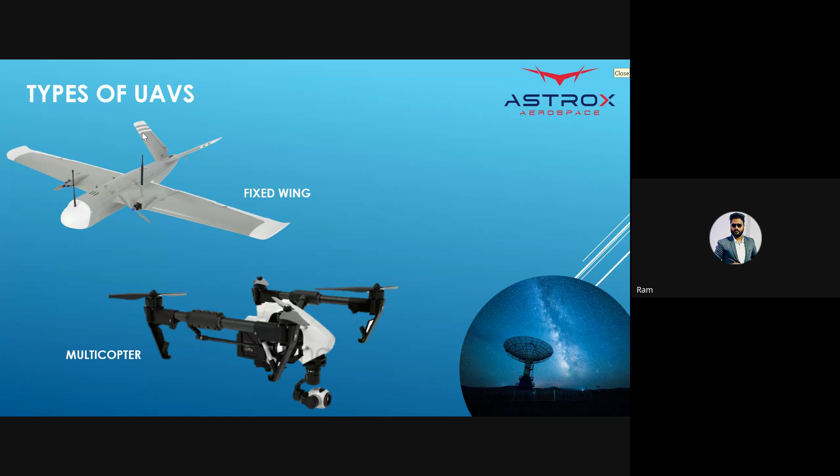Single copter is like a helicopter model. So these are the four major models used for all other applications: fixed wing, multi-copter, single copter, and hybrid VTOL.

The advantage of multi-rotor is that it's a vertical takeoff, very easy to operate, very low cost. It's a short time deployment - within 1 or 2 minutes you can deploy it for operational purposes.

But the fixed wing takes time for calibration work and checking the wind condition. We have to check the weather condition, the zones, landing points, what is the area coverage, and the entire wind direction. So there are a lot of things we have to notify during the flight.

But multi-copter is not like that. We only have to check the zones and do a pre-flight checklist. That is enough for operating the multi-rotor. Single rotor is in the same condition as a fixed wing.

In the previous session, I told you, right? DGCA classified some rules. The major rules everyone should know about - drones are classified based on the weight category: nano category, micro category, small category, medium category, and large category.

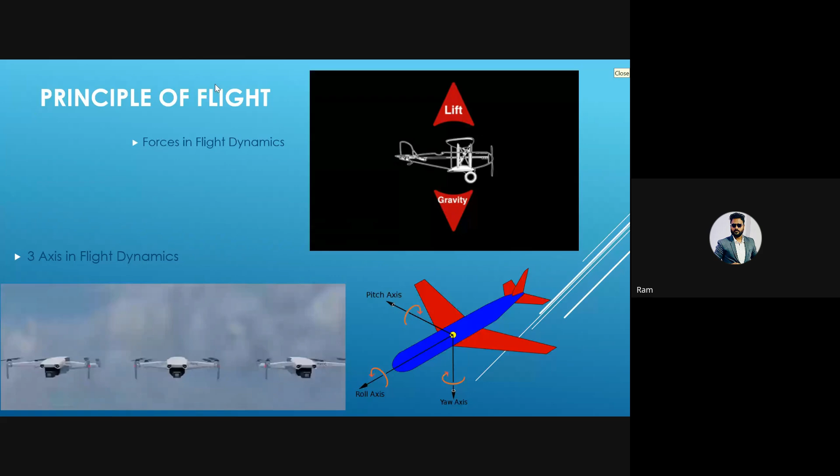The same four rotors are used to propel thrust downward, and then the takeoff will happen.

One main thing, the rotation of the drone's propellers, is very important. Check the rotation of A, B, C, D. If propeller A rotates clockwise, then the opposite one, D, also rotates clockwise. If B rotates counterclockwise, C should also rotate counterclockwise. Only then will all four motor torques be compensated.

That's why a helicopter has a tail motor, to compensate for torque. The same method is used in drones to compensate for torque.

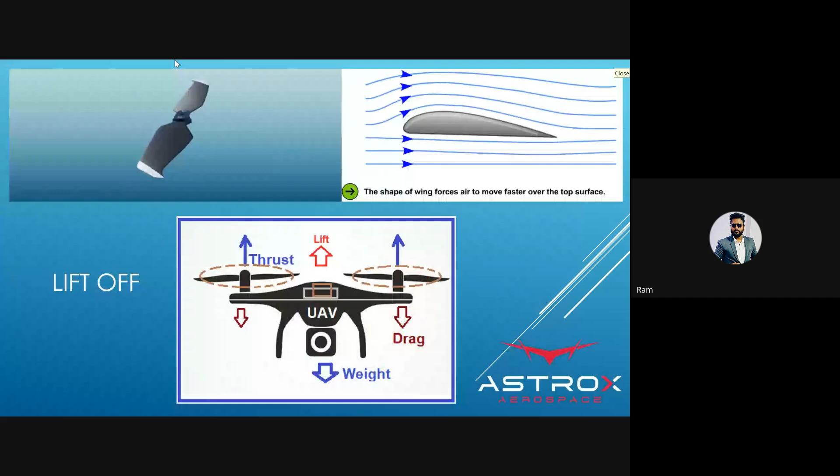Mostly we use drones in X configuration for application purposes, because it gives more stability.

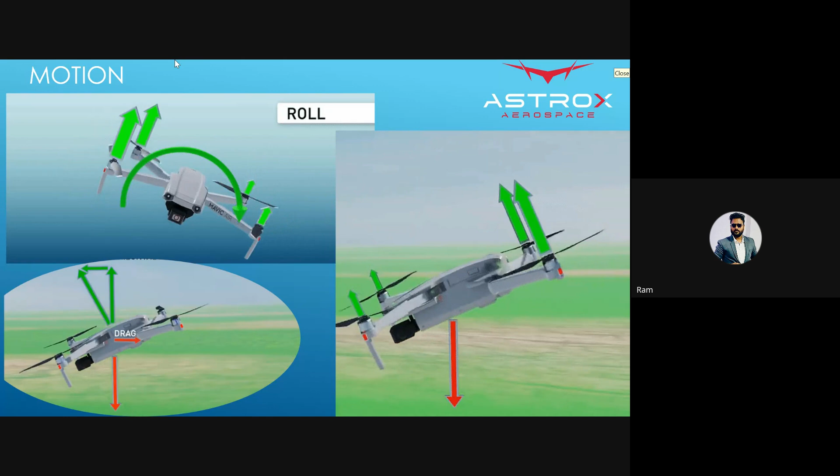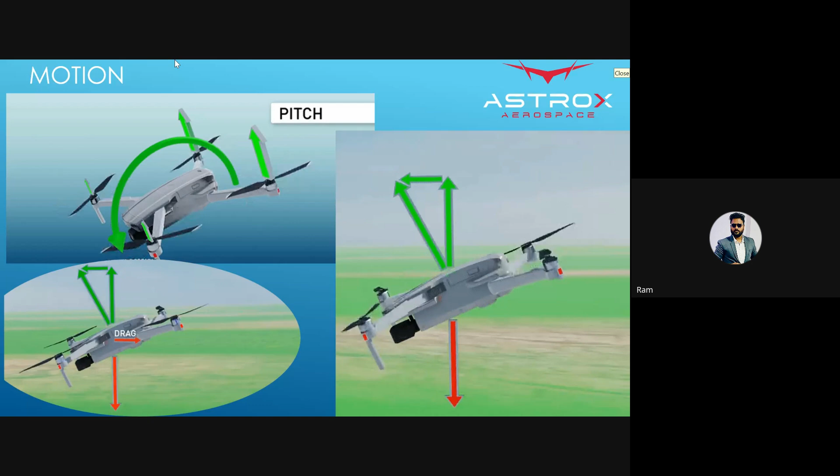This is the roll, and this is when it's moving in pitch. So these are the motions of the entire drone: pitch forward, pitch backward, roll right, roll left. There are only these four directions used for the drone.

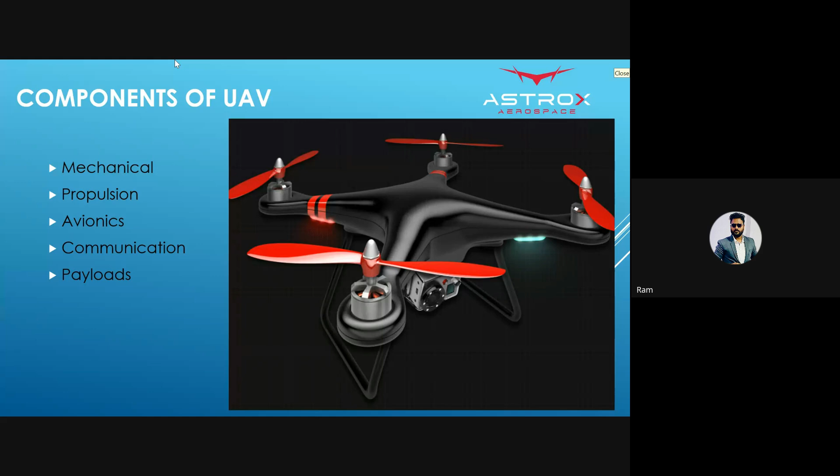The mechanical system is the entire drone structure. The propulsion system includes the motor and propellers. The avionics system is the entire electronics which communicate from ground to the air unit, including the IMU and other sensors — all of that comes under avionics and communication.

The payload is purely based on the application. So you can see which drone is used for which application, like survey or agriculture — that comes under the payload category.

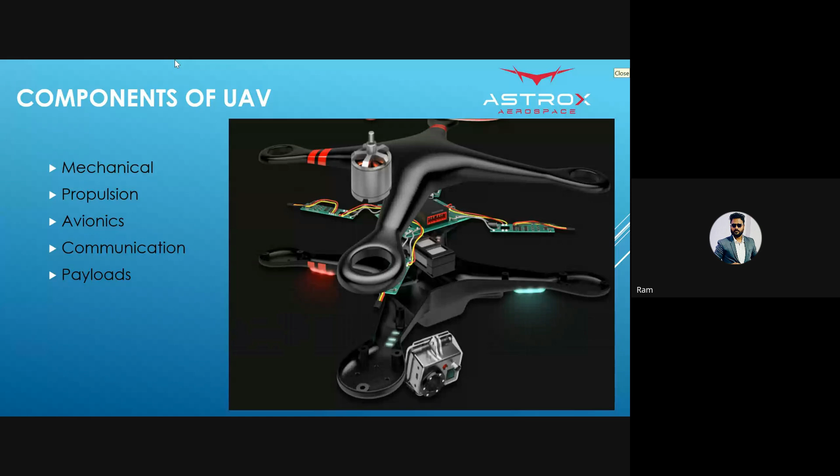These are the mechanical components, basically the frame: X frame, fixed wing meaning the wing, the fuselage, and the landing gears. These are the components of the aircraft.

This is the propulsion system. Especially for drones we use the BLDC motor, the brushless motor, because it's a high torque motor which gives more thrust compared to a normal motor. Its weight is also less, and weight plays a major role in the drone — the more we focus on reducing weight, the better the drone we can get.

Mostly all motors use an electronic speed controller, so each motor has an ESC rated at something like 30 amps, 40 amps, or 60 amps, depending on the drone's configuration. The propulsion system mainly has two important parts: the electronic speed controller and the motor, along with the propeller.

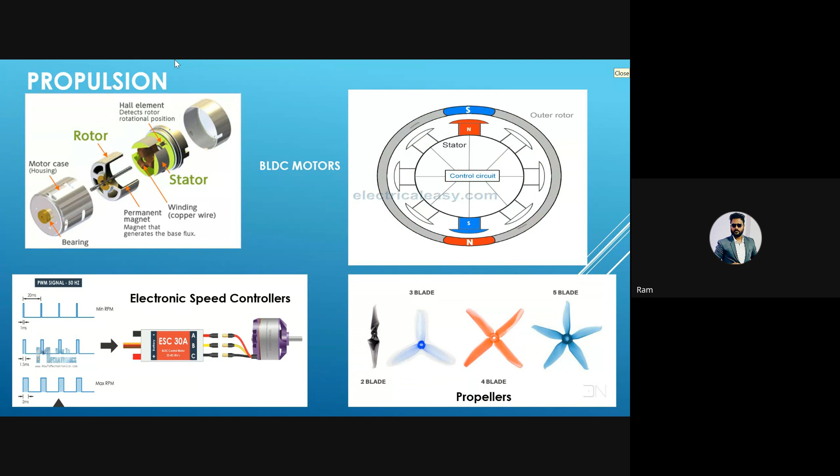There are multiple types of propellers: two blade, three blade, four blade, five blade — all based on the configuration. We have to choose the propeller size and ESC capacity, like 40 amps, 60 amps, 80 amps, 100 amps, or 120 amps, purely depending on the product you build, like a 5 kg drone or a 10 kg drone. This is the entire propulsion system used for the drone.

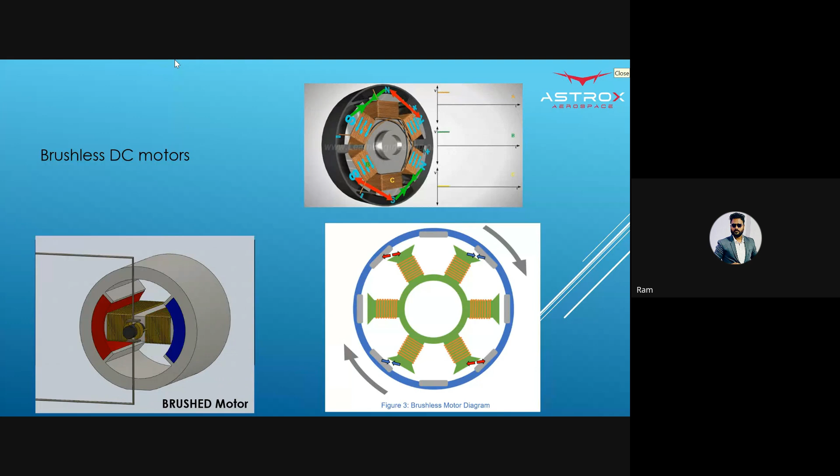See, in the brushed motor, the armature rotates, but in the brushless motor, the outer rotor rotates while the stator remains fixed. Only the outer case runs. This is the difference between the brushless motor and the brushed motor.

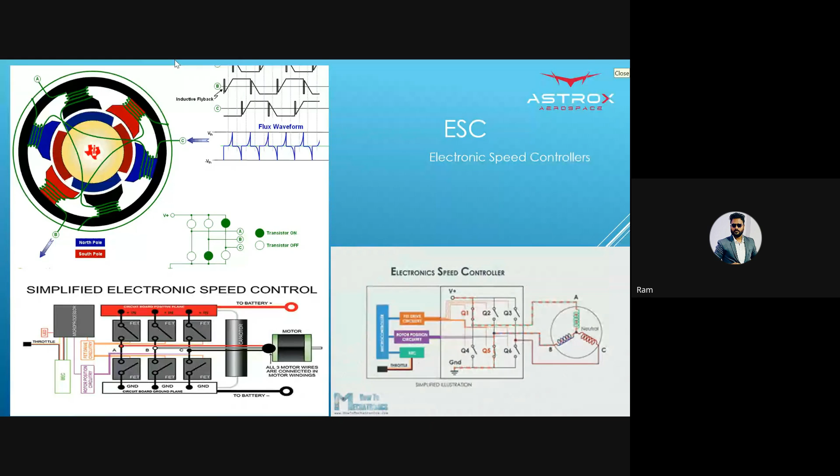Now coming to the avionics system. In the drone, the major thing is the flight controller. It's one of the main motherboards, like inertial systems, computers, whatever you call it. The major role of the drone is the flight controller.

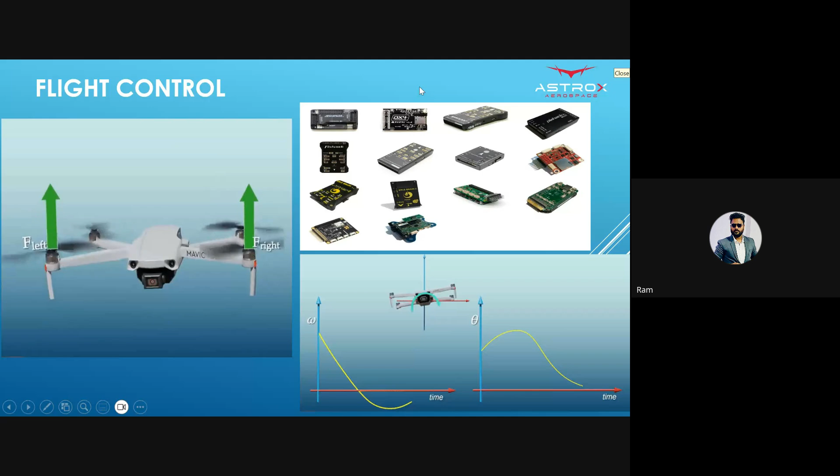In the market there are a lot of flight controllers: single IMU controller, dual IMU controller, triple IMU controller. It basically depends on our requirements. For industrial grade, at least we require a 3 IMU redundancy FC, because it's very stable compared to single redundancy IMU. This is the flight controller which is used for all drones.

Flight control's main thing is the inertial measurement unit. So IMU has the gyroscope, accelerometer, magnetometer, depth sensor, optical flow sensor. But the major essential requirement is the gyroscope, accelerometer, and magnetometer. These three are the major requirement to operate the drone in a very stable condition.

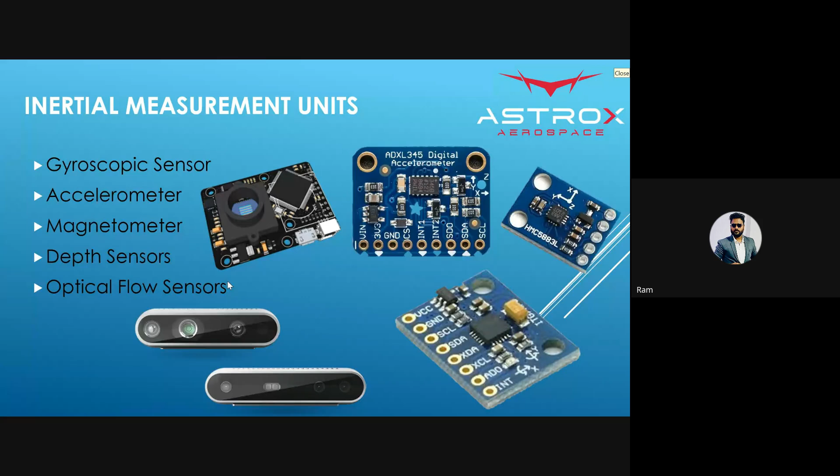You can see the accelerometer. Basically, the accelerometer is used to measure the acceleration of the flight controller. It detects the acceleration of the entire drone. Based on the drone coordinates like X, Y, Z, it will stabilize the entire drone system.

Gyroscope is the control of the entire axis, like roll axis. It measures the entire system and gives input to the flight control. Flight control gives input to the entire ESC, which gives input to the motor. So the entire ecosystem works purely based on the IMUs.

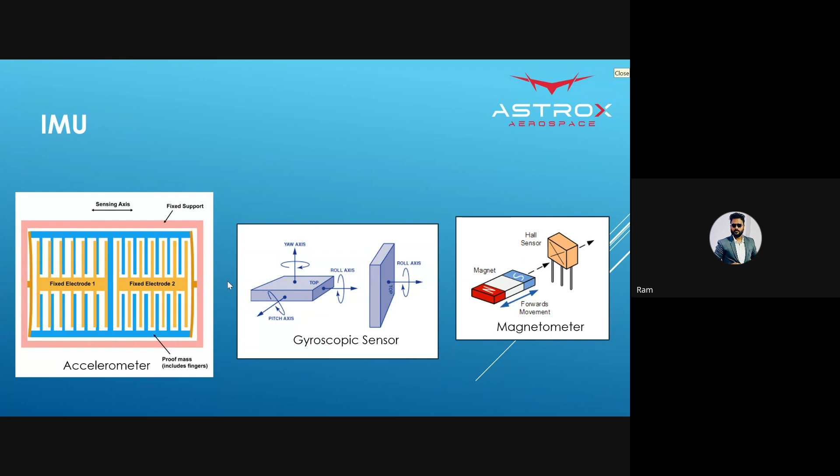The magnetometer measures the entire magnetic interference. For example, if the drone is flying near some high capacity EMC or EMI, like electricity wires, the magnetometer will be affected. So the entire drone will become unstable and it will lose control. That is why we use the magnetometer, to measure the entire magnetic field.

Now coming to the communication. In the drone we have multiple communication systems: radio signal, satellite signal, internet signal, which we already developed with indigenous technology. These are all the technologies used for communicating with the drone from the ground station to the air unit.

Drones flying around 10 meters, 20 meters, 100 meters, 120 meters - if you give some input, like a 20-degree rotate or 20-degree elevation, or 10 meters forward, the immediate response should happen within a time of milliseconds. So basically we use two technologies: radio controller, radio frequency, and we can also get telemetry data, like what is the battery capacity and other things - everything we can get from the drone.

These are one of the major communication tools, radio signal. Everyone majorly uses radio signal. So this is a very effective transmission method currently in use.

Another one is satellite. Satellite is very tough, and also it has very high latency issues - around 3 to 4 second delay in signal. So this is not sufficient for drone operation.

Internet is very good for both radio and internet combined, because currently in India everywhere 4G network, 3G network, 5G network are available. So internet is also sufficient, but the most accurate is only the radio signal. So radio signal is the best thing for controlling the drone and ground station.

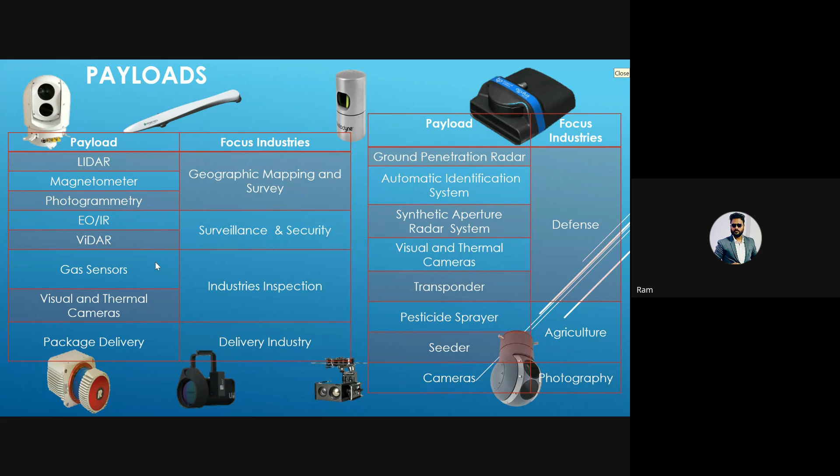Next is the package delivery payload. Package delivery is nothing but essential goods, medicals or other items, used as payload for delivery. Whatever package we can integrate with the drone, we can send from A to B location for delivery purposes, like cargoes, medicines, and other goods transferred from one location to another.

So I'll show you one by one in detail. The first payload is the multispectral camera, one of five sensors: red, green, blue, and others. There are five sensors. The multispectral camera is used for agriculture, cropping, and health monitoring purposes. We can easily get irrigation data of the crops and crop health of particular areas. Based on the data analysis, we use agriculture drones for pesticide purposes. It's a very effective method to verify crop health conditions.

Another one is the photogrammetry camera, used for mining, mapping, and 3D map generation. It has lidar sensors used for 3D mapping, so we can easily get data from mining areas, forests, and railway tracking. The 3D mapping camera, or photogrammetry camera, is used for mapping purposes.

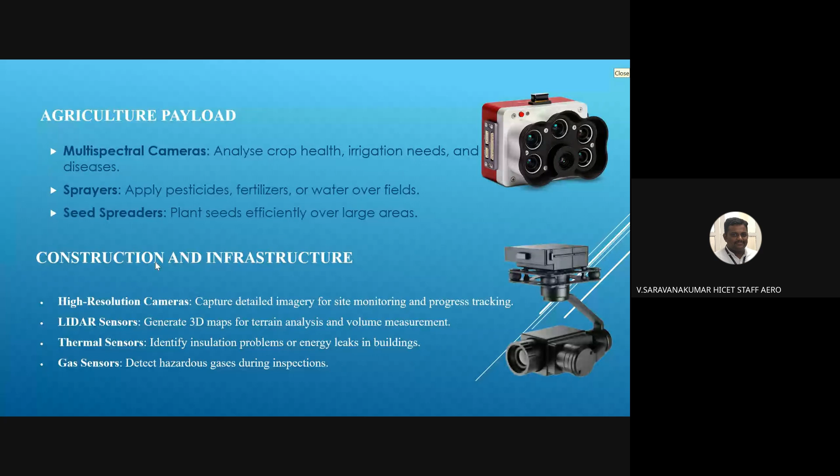Sir, is there any doubt in the payload? Is this the only payload used for all applications? Yes sir, tell me. Sir, shall we ask questions regarding the payload now, or can we go at the end, sir? Whatever it is, sir, what about ultraspectral? I'll tell you in a while. Can I go on? Yes sir, you can go on. Okay, at the end we'll ask. No, these are questions, the payload sessions will continue.

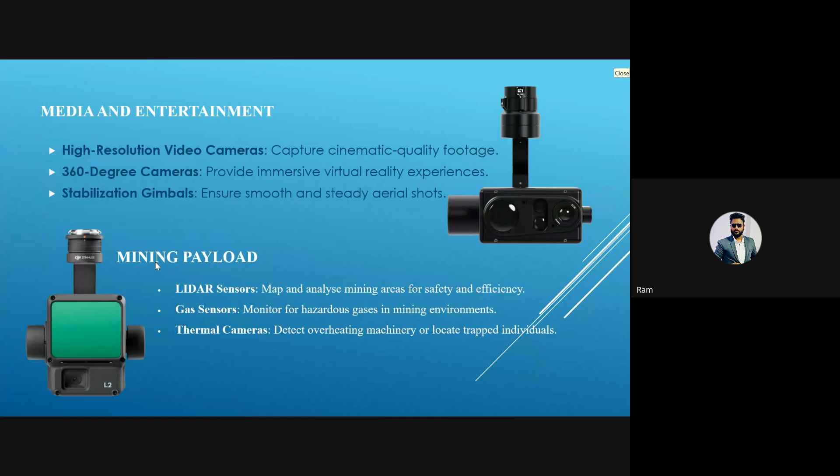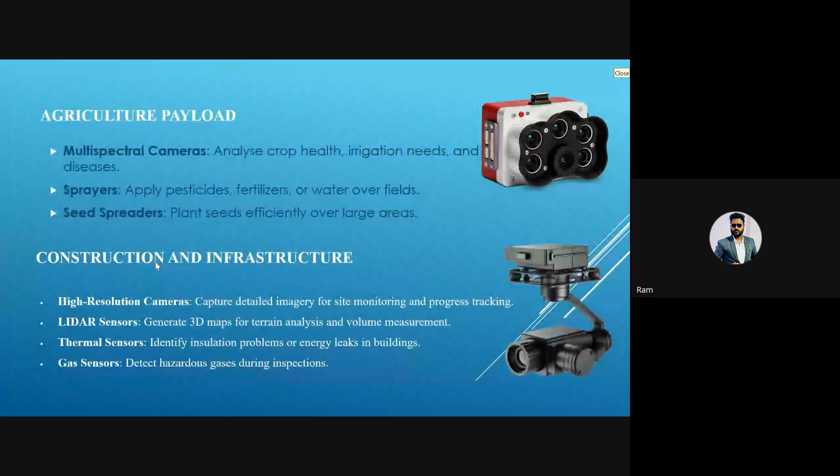These are the payloads you use for drones in all applications like surveillance, survey, deliveries, inspection, and monitoring. I have mentioned the entire payload here. Apart from this, is there any doubt in this payload like lidar, photogrammetry, gas sensor, visual and thermal sensor, or deliveries? You can tell me any doubts, sir. These are the payloads used for drones.

Then we'll go for some advancement. So, payloads, no doubt, right sir? I think you know, sir. Okay participants, if you have any questions, you can ask related to payload. You can ask it to me. Otherwise, in the final session we'll close with advancement of drones. Then we'll do some Q&A. Okay, so these are the drones used for all industries like surveillance, agriculture.

Sir, regarding the payload, you are using it for agricultural applications. Suppose while spraying the pesticides, once the tank level varies, how is it dynamically balanced?

See, mostly in agriculture we use 6 motor drones, like a hexacopter. Also, as I told previously, there's the IMU. The IMU maintains the stability of the drones.

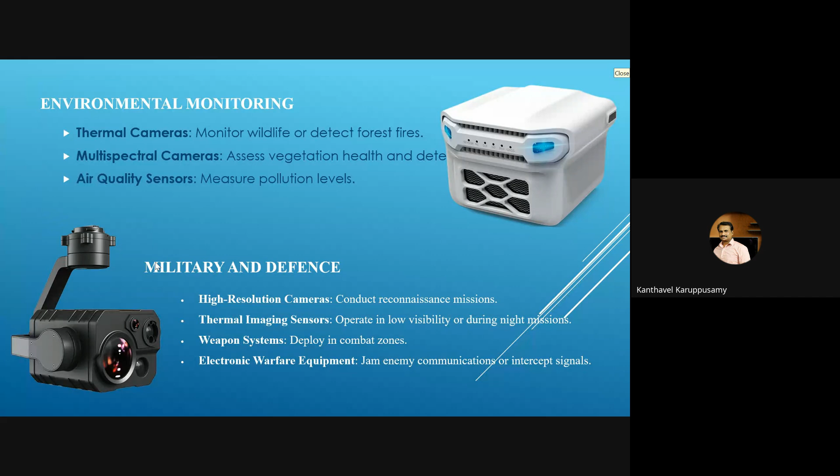So the IMU is helpful. What is the maximum range available, sir? Which one, sir, thermal sensor? The thermal sensor detects a range of around 1.2 to 1.5 kilometers, sir. The visual sensor can cover around 2 kilometers. It's capable for detecting elephants purely under tracking FOV. Currently we use it to detect at 120 meter height, but it can detect elephants around 1 to 2 kilometers easily. Thank you, sir.

Sir, what will happen if the drone goes beyond the range? I'll tell you one thing: every manufacturer provides a defined range in kilometers before the drone is used. For example, agriculture drones are restricted to around 1 kilometer, while surveillance drones have a range of around 10 kilometers. You cannot operate the drone beyond that limit. Even if you give it thrust, the drone cannot go beyond 1 kilometer. So every drone has a restricted range defined by the manufacturer. If you try to go beyond the set limit, it cannot go and it cannot receive your command.

So will it give some alarm or indication to us? Yes, it will give an alarm. There are two options: one is that you can give an input in the settings to enable RTL. RTL is one such technique, return to launch or return to home. If the drone breaches the entire range, for example if the maximum range is 1 kilometer, once it reaches that 1 kilometer, it gives the information and activates RTL.

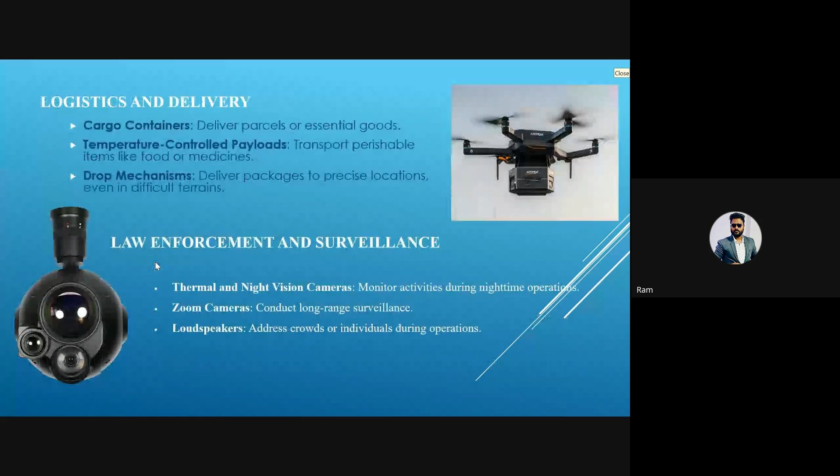Sir, regarding this electronic speed control, I heard that the control will be done in two parts - one is like a flight controller and the flight computer. Like what exactly it is? Okay sir, the basic working principle I'll tell you.

The flight controller is the major brain of the drone. On the ground, you can give an input like go 1 meter. So the ground controller gives a signal to the drone, it will transfer through the radio signal. So the drone receives the signal from the receiver - each drone has a receiver.

Whatever signal is received from the ground station, it will go to the flight controller. Flight controller is the brain, like what we are thinking, right? So the ground person gives an input of 1 meter, move to 1 meter. The brain takes that input and gives it to all 6 motors through ESC. If you put right now, so the receiver receives a signal from ground, the signal goes to the flight controller, the flight controller gives input to the ESC.

If you put right now, the flight controller receives the right command, the right command goes to the ESC, ESC gives thrust to the motor. Then the first 3 motors rotate fast, the opposite motors rotate slowly, and it automatically goes to the right.

So this is the basic principle of drone working. Whatever input you give from the ground to the air unit, it first receives the signal to the flight controller. Flight controller is the brain - it receives all commands and gives them to the motors. So it's based on this working only. ESC is just used to control the motor - ESC receives the signal from the flight controller.

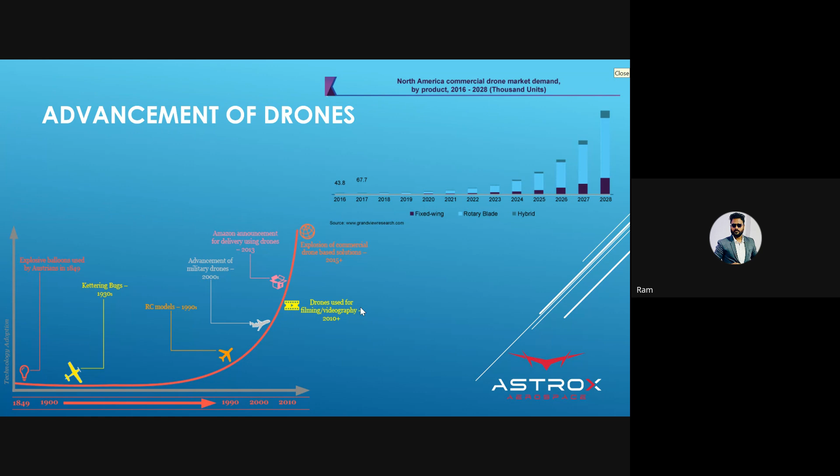In generation 1, it's basic remote control used for controlling drones. Generation 2 used static design, fixed cameras, video recording, still photos, and manual piloting control. Generation 3 had more complex designs like fixed wing, some eVTOL, gimbal cameras, basic HD video, and basic assisted flying. Generation 4 used 3-axis gimbal cameras, high quality 4K recording, high quality autopilot, and high quality obstacle avoidance. The latest generation uses 360-degree cameras, 4K cameras, and intelligent flight mode.

If you press one button, it automatically avoids the obstacle and goes to the home location. Now, generation 6 is for commercial delivery drones, commercial drones for application purposes like pesticides, and other purposes like videography in the cine industries, and inspection industry.

Generation-wise, drones take up entire applications, the entire ecosystem they cover. So in our current situation, around 13 to 30 to 40 applications are used for drones to get solutions easily.

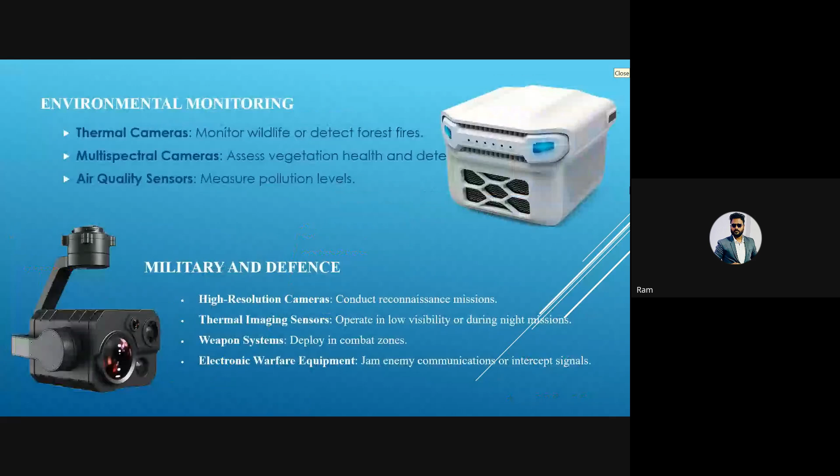Like in the cine industries, video recording, high quality recording. I'll show you one photo. Everyone knows about FPV. This is the FPV, which is used for adventure videos like a 360-degree rotation, a flip rotation.

So these are the payloads used for different applications. So the final thought is that mostly drones are used for applications, and for that we require some payloads.

That could be a surveillance camera, or a tank carrying 10 liters of pesticides or liquid, 10 kg bombs for defense purposes, or other high capacity payloads, 4K cameras. There are multiple payloads used for application purposes. These applications belong to payloads.

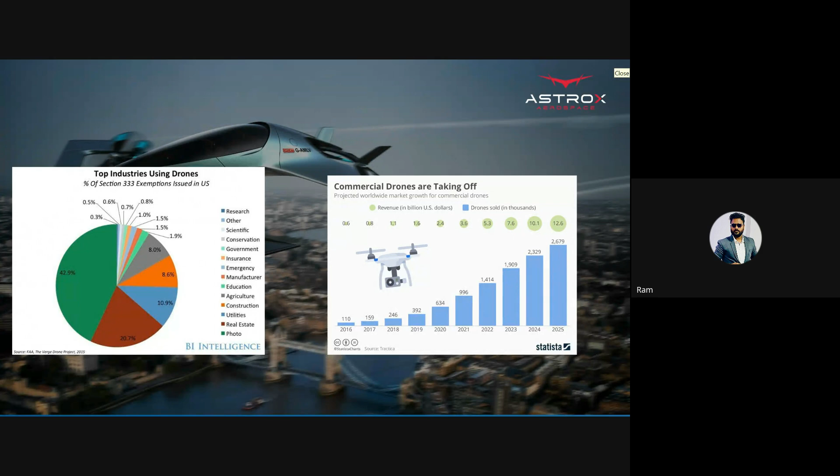You can see that commercial drones are used for agriculture, construction, emergency, education, and real estate. These are the advancements of drones.

Domino's use drones for delivery purposes; during emergencies, drones carry medical kits like CPR kits. This is a hydrogen powered drone. This is an eVTOL, like manned. The operation purely depends on unmanned operation, but a man will go into this eVTOL. It's not actually manned operation.

This is a solar equipped drone, which flies continuously for around 20 to 30 hours for surveillance purposes. This is an agriculture drone. These are all payloads for various applications.

So thank you everyone for this session. Now ask anyone any doubt about drones, or any other things related to payload or operational purposes, or how drones work. You can ask me questions so that I can explain it clearly.

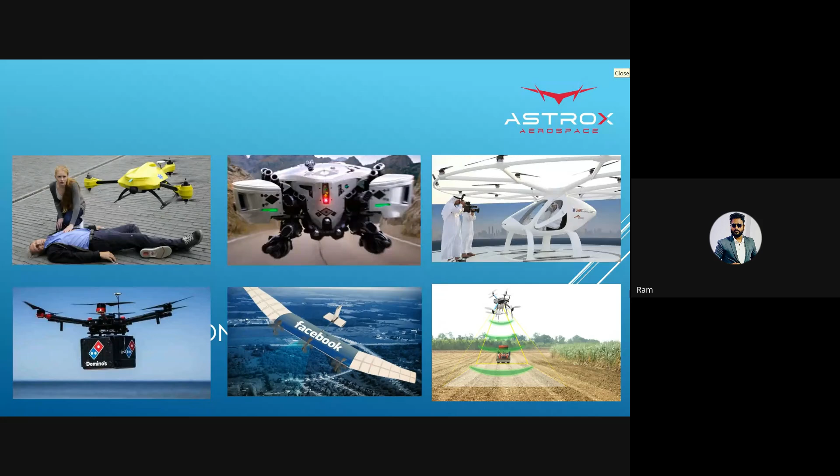Good evening, sir. Ram sir, you have explained nicely, we have more information today, thank you. Sir, I have a clarification here. You have already explained it, but I have a clarification.

Sir, when you construct a drone for some purpose or application, what is the factor of safety we have to maintain? First of all, in drones, we need to concern about the payload, as you said, the camera is the weight, or the sprayer is the weight. Similarly, we adapt application-related things in the drone construction. When we go for design itself, we have considered these things.

How do you go for manufacturing the drone? Are we going to do 3D printing or any other methodology we can focus on?

So what is the factor of safety we have to maintain with relevant to the weight and size? How much design factor do we have to follow? I'll explain clearly, sir.

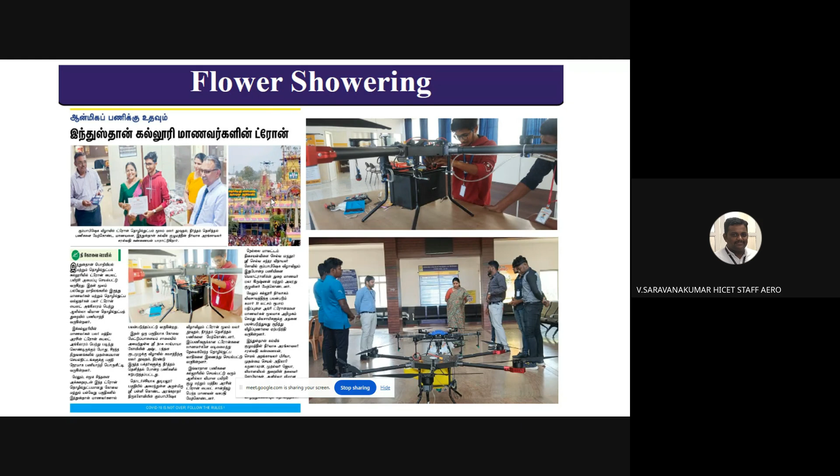We also train government ITI students. We have a government ITI MOU with the Drone Center of Excellence and Unmanned Aerial Vehicle Club, where we train students of the government ITI drone trade. There are only 2 ITIs in Tamil Nadu, Chennai and Coimbatore, which have started a drone trade in ITI with the NSDC syllabus. We are proud partners, training students through guest lectures, workshops, and other modes of technology transfer, and we also train NCC and NSS cadets in our college.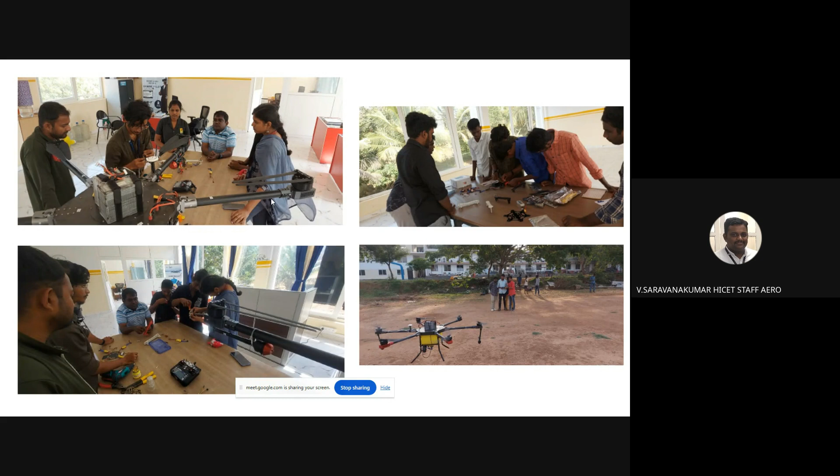We train agriculture department students from our center of excellence in drone assembly, agriculture drone assembly, mapping, and related areas. We also train other college and polytechnic students, and send our students for competitions. We conduct drone championship events and participate in several innovation hackathons across Tamil Nadu and India.

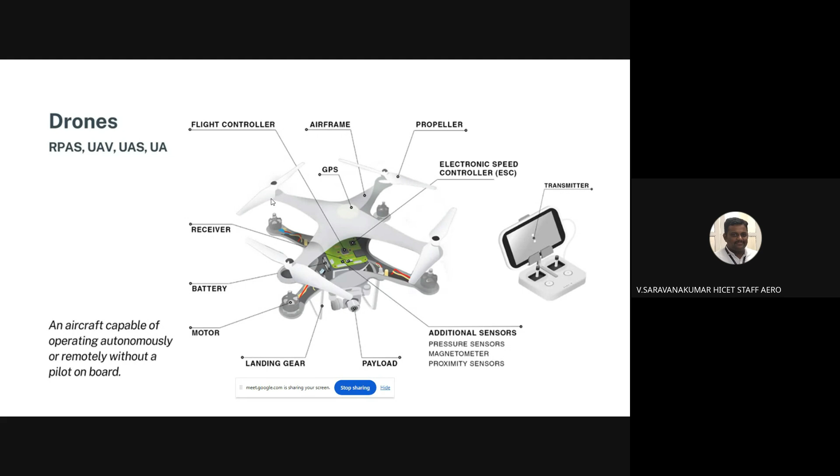Since I have been associated with all these activities, and since I have been part of RPTO, I'm here to explain the rules and regulations related to drones in our country. We have discussed a lot about what drones are, flight controllers, sensor fusion, AI driven systems. Now my topic is: why do we need to regulate a drone? That is the most important point.

To ensure public safety, protect privacy, and prevent conflicts with other aircraft and property, we need to regulate drones. That is why drone regulations have been developed in our country, only starting in 2016, 17, 18. That is when our country started concentrating on developing drone regulation, thanks to companies like ideaForge and the Drone Federation of India, an NGO. A few companies at the time insisted to the government, the Ministry of Civil Aviation, and through that we reached a position of strict drone regulations. We are probably in 2029-30 to become the world's drone hub with these regulations in place.

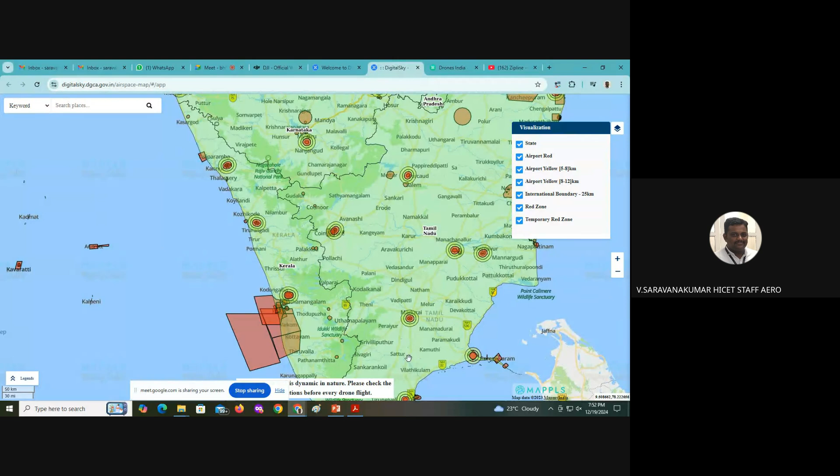There is an option in Digital Sky called the airspace option. Previously, I think Manikandan sir or someone was asking how to find whether the area you're in belongs to a green zone, yellow zone, or red zone. So I'll just take you there. I'm zooming in to show the place where our college is located.

So all these are green zones. Whatever you can see here are all green zones, which means this is where our college is located. These are green zone, so no permission is needed. Being an educational institution, if you make a trial flight inside our campus, no permission is needed. But when you move away from our institution, we need to look into all these zones. So Hindustan falls in a green zone.

I'll just move away. You can see at some point I'm getting the outer yellow circle, which means I need to be very conscious when flying here. And there are areas where I can see an inner yellow circle, and areas where a red zone is also visible.

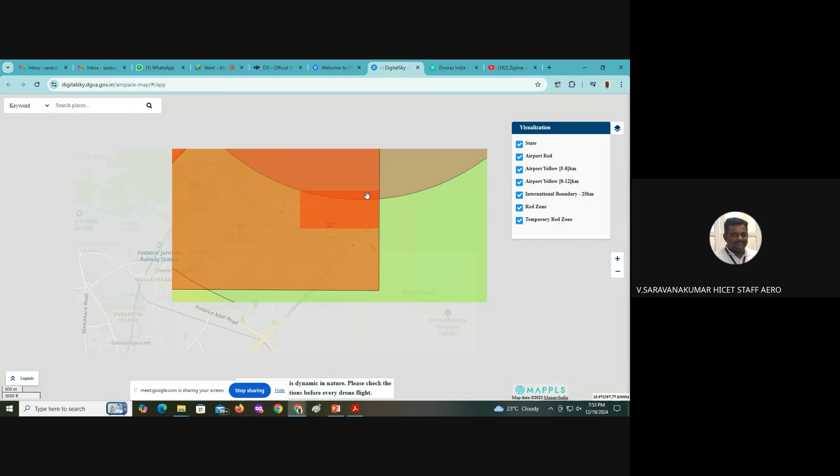These red zones are closer to an airport or an area where aircraft are landing and taking off, if possible. That is why it has been marked as a red zone. You can see here the airport - this is the runway of Coimbatore International Airport. So it obviously becomes a red zone.

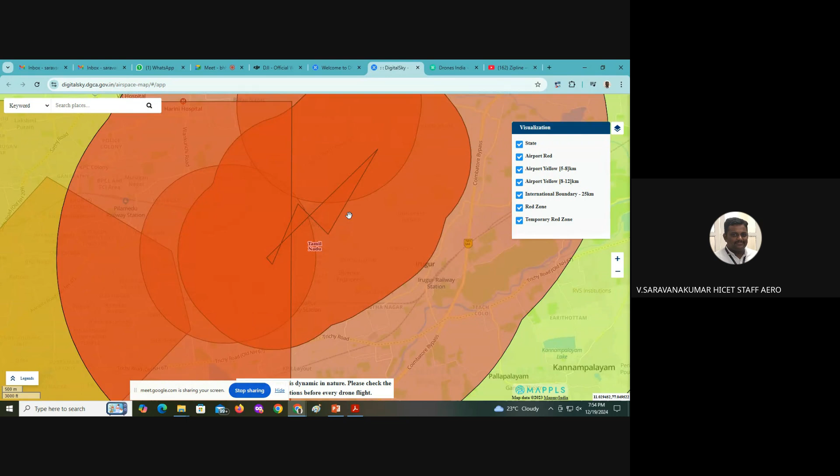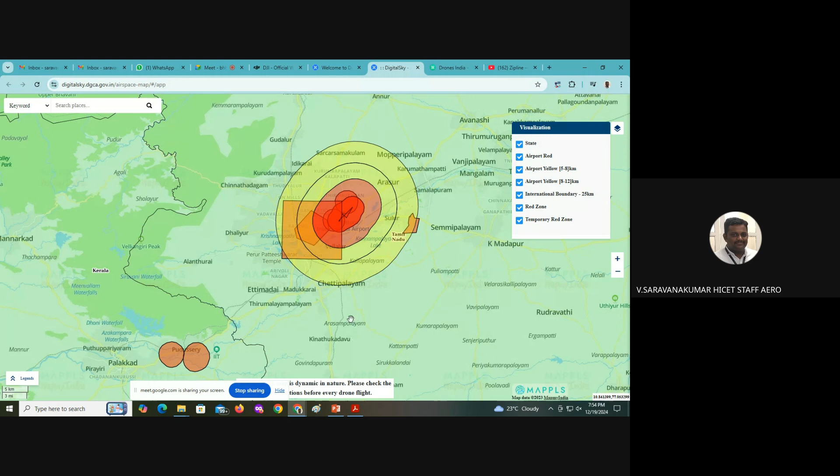When I took this, it is live, taken from the Digital Sky website. If you want, I can share this link in our WhatsApp group so that when you are flying your drone, you can just check before flying. So, coming back to the presentation.

These are the four zones we have to concentrate on: red zone, inner yellow zone, outer yellow zone, and green zone. Within a 12-kilometer radius, we have to be very conscious when flying, especially around airports or air bases which are restricted.

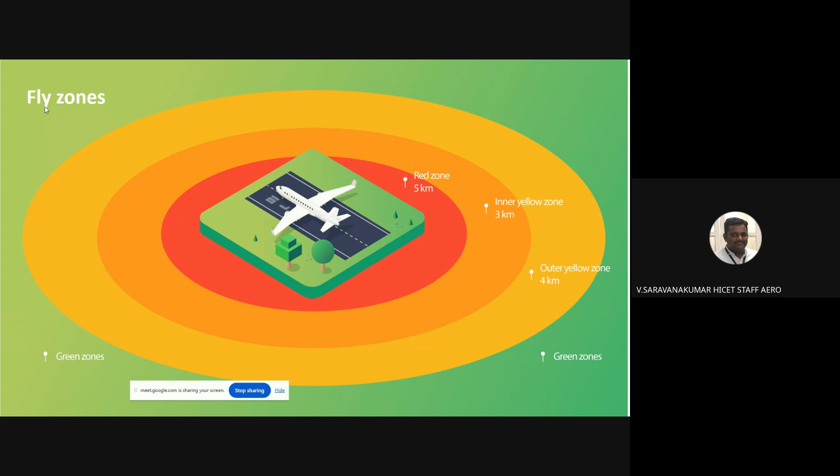There are global regulatory bodies available. FAA is taking care of drone classification rules in the United States, and for the European Union, EASA takes care of the categories and certification process. For Australia, the Civil Aviation Safety Authority takes care of all the rules and regulations.

When it comes to India, the Government of India, with the help of the Ministry of Civil Aviation, tasked the Director General of Civil Aviation to develop drone rules, initially developed in 2018, given to public opinion, and then revised. There were many revisions taking place. Even next year we might get some revision - whatever I'm saying today might not be applicable next year.

There might be some limit changes based on comments or feedback from manufacturers and operators. Our Director General of Civil Aviation is working on this. So I'm going to talk about the Drone Rules 2021 and what categories are available.

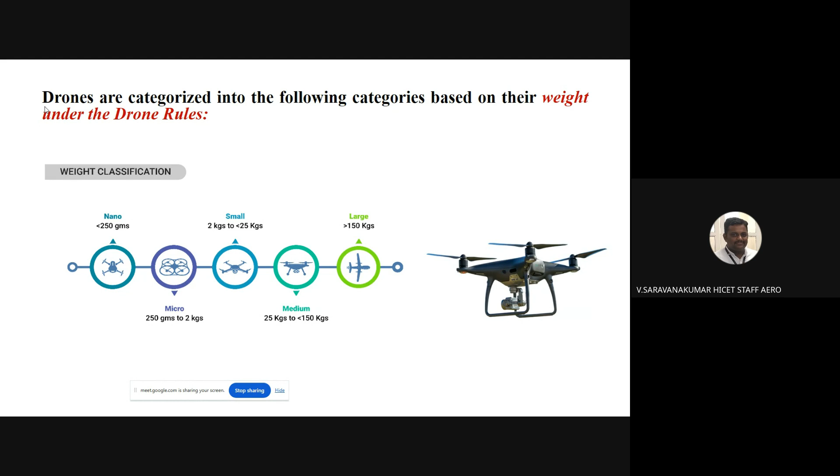For a drone, say we want to register it - you might ask why we need to register.

If you want to sell a drone in our country, or operate a drone for any kind of service, we need to register and obtain a UIN number, a unique identification number exclusive to that particular drone. The latest regulation says that to apply for a UIN, whether you're a manufacturer or an operator, you need to study and submit so many documents with respect to digital sky. Only then is it possible for any individual or company to achieve it.

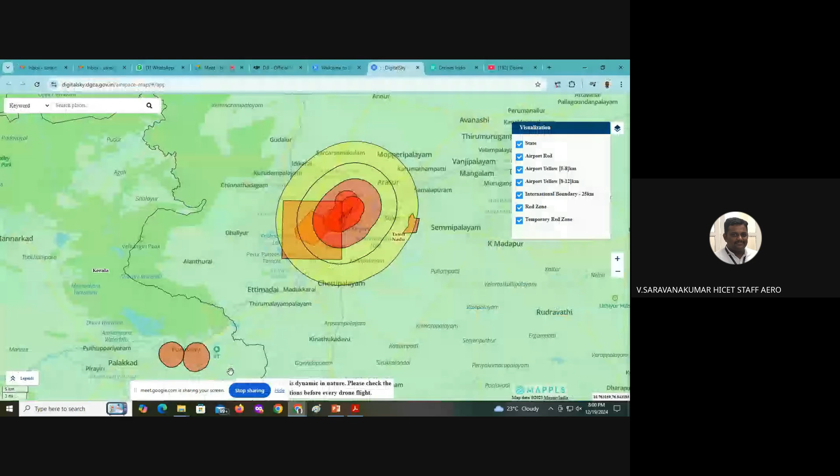I'll go through that website again. This is the home page of the digital sky portal, where if I want to register, I can register. I'm clicking the option Register on top right. There are two options: login and register. Once we are registered, we can log in with our username and password.

So I am registering. There are 5 questions we have to select from: whether I want to use a UAS, or I am a UAS manufacturer or importer.

Importer is a very important word, because you can import a drone from another country, but there are certain rules to follow, separate from buying a drone from an Indian manufacturer. If I get a drone from another country, the process is different, and there are additional things to do compared to someone getting a drone from India. So I have to specify whether I want to use a UAS, or I'm a manufacturer or importer, or I want to become an RPTO.

If you're an educational institution and want to become a Remotely Piloted Training Organization, which means you can train pilots, your students, or students from other colleges who meet the eligibility criteria, you can become an RPTO. So you can click that.